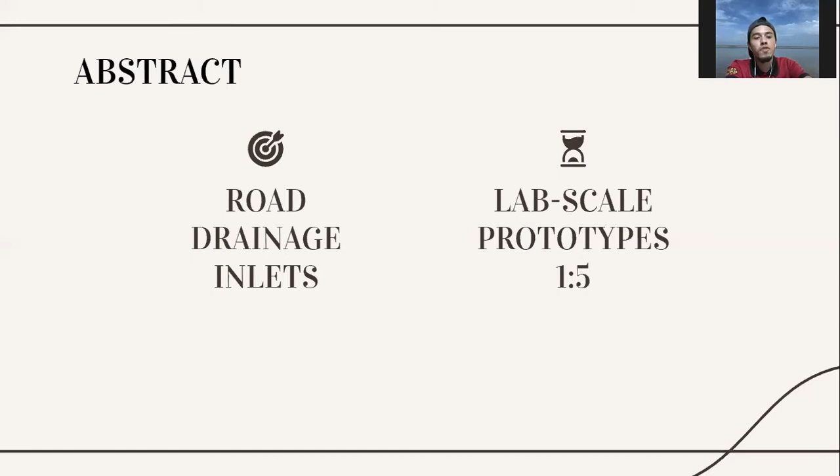Abdullah Al-Mamun. First and foremost, for the introduction, I would like to highlight my topic focused on studying common road drainage inlets. Hence, I needed to construct the prototypes as lab size to fit with the hydraulic lab equipment.

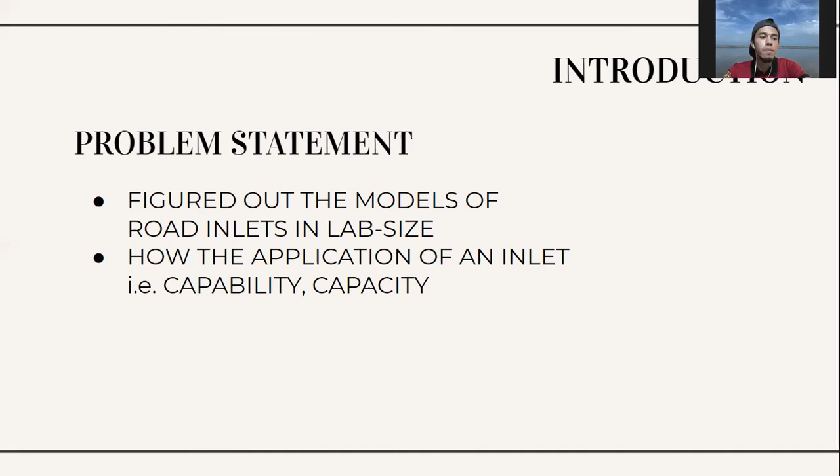Next, the problem statement: the topic was completed in order to figure out the models of road inlet in lab size first, then to carry out how the application of an inlet is in terms of capacity or capability, etc. That's related.

Then the objectives of the project are to study the rainfall intensity relationship in order to establish the commonly used models of road inlets in physical lab size, and the last one is to figure out the hydrology

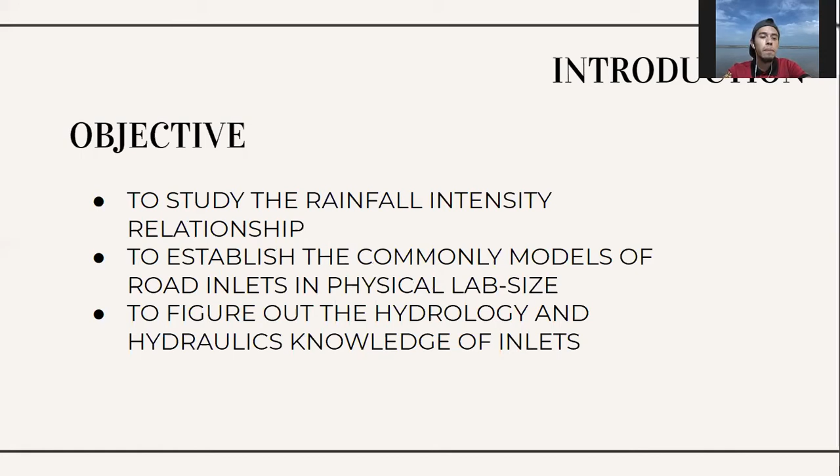knowledge related with them. For some brief methodology, lab work experiments were done to collect some parameters of data, such as water depth and outflow discharge of an inlet, plus the selection and assembling of the road inlet

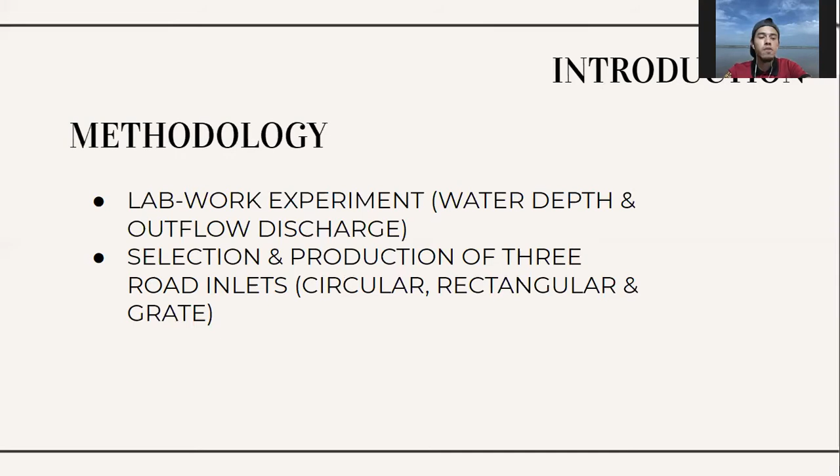models. For the inlet selection, I had selected the circular, rectangular, and also the grate types. The materials that were used are plastic boards, PVC pipes, and a few other things.

For the literature review of this study, some listed keywords were explored, such as rainfall intensity, hydraulic structure, weirs and general concept, discharge capability, discharge coefficient, steady state flow, etc.

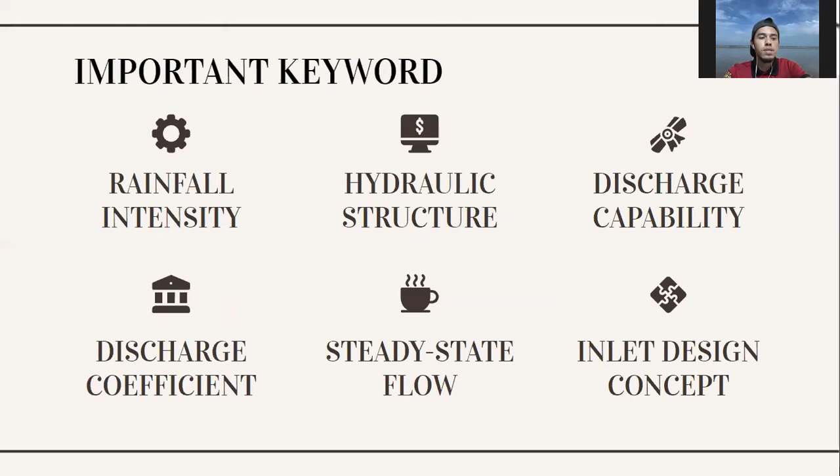For the detailed methodology, the first phase was in FYP1, which focused on research activities. The second and third phases focused on selecting the inlet, constructing them, and also lab activities. Then results and analysis were the last part of the project.

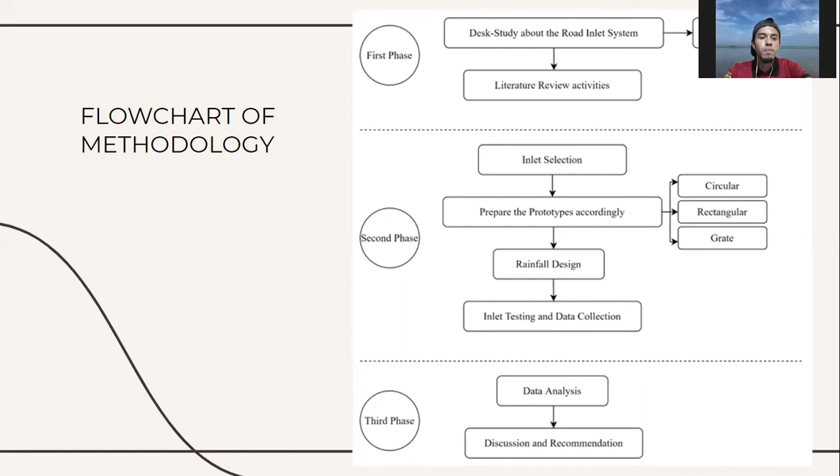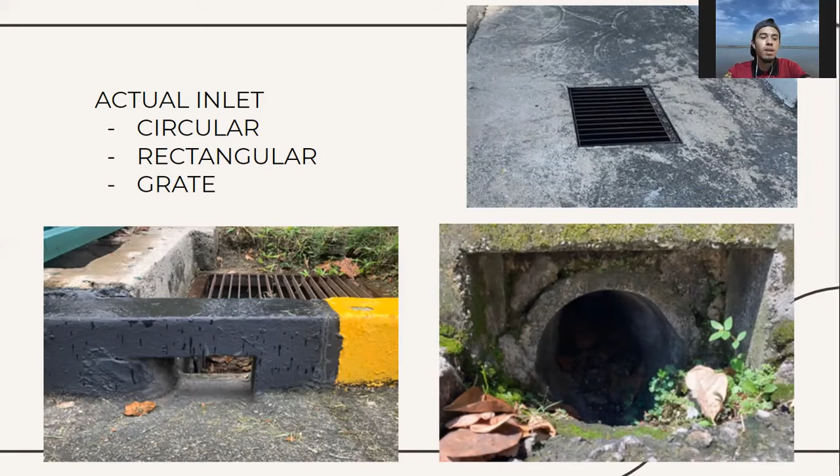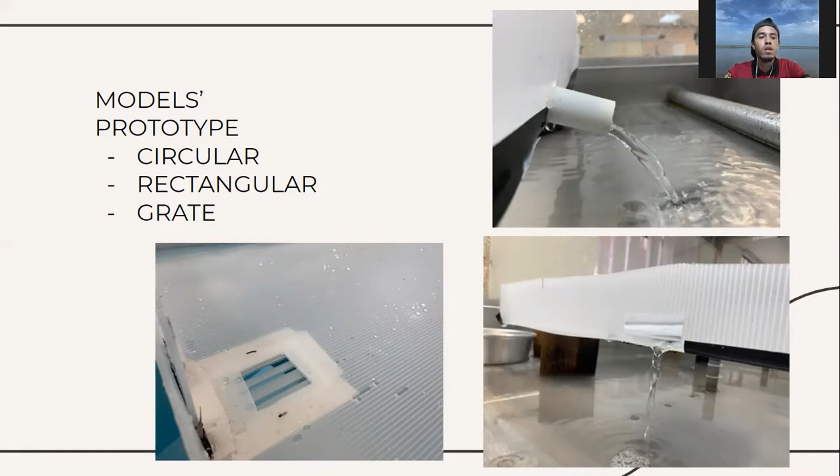For the prototypes, I scaled down the size to be around 1/5 of the actual size.

Next, the important equipment used was the rain simulator, as the inflow rate could be set by the meter, and the rain simulator can be used in the hydraulic lab.

Next, this is a short procedure during the experiment. The inflow rate was manipulated to a few readings for all inlets to see the comparison. Four sprinklers were used, so the area covered by the rainfall was around 0.25 meter square total.

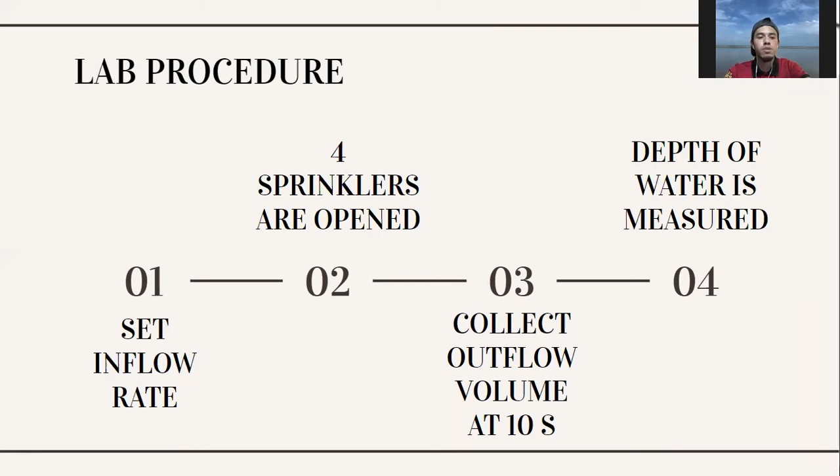After that, discharge water was collected at 10 seconds consecutively for 3 times to get the average. Lastly, depth of water around the inlet was also measured.

Then we move to the result and discussion part. First, rain intensity was calculated by converting the inflow rate. Then calculated inflow was obtained by using the rational method.

Because we are using a specific area, the outflow seemed to be proven with inflow from the meter. After getting all the parameters, some calculations were done to make the analysis. Water depth was measured to study the difference influenced by different types of inlet.

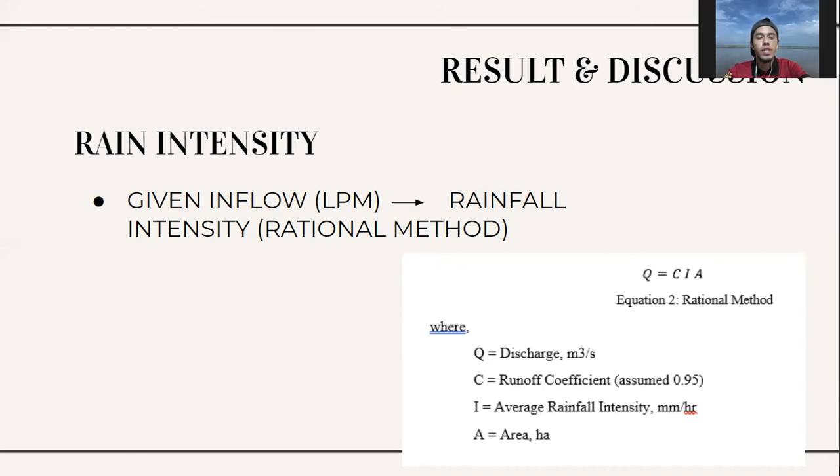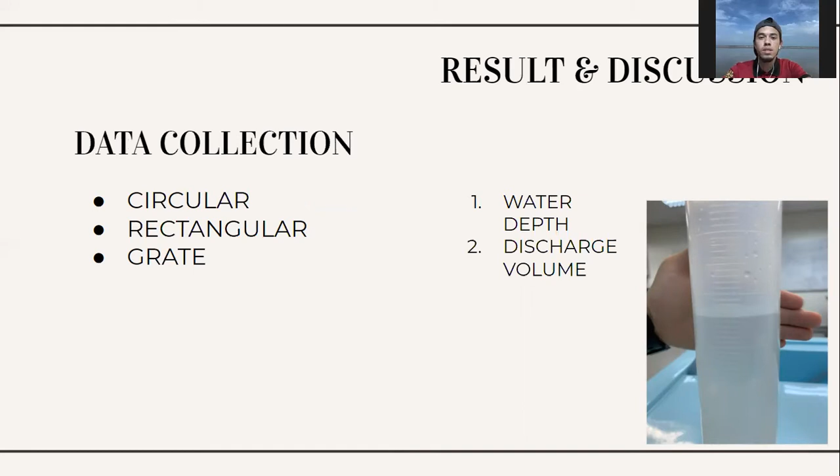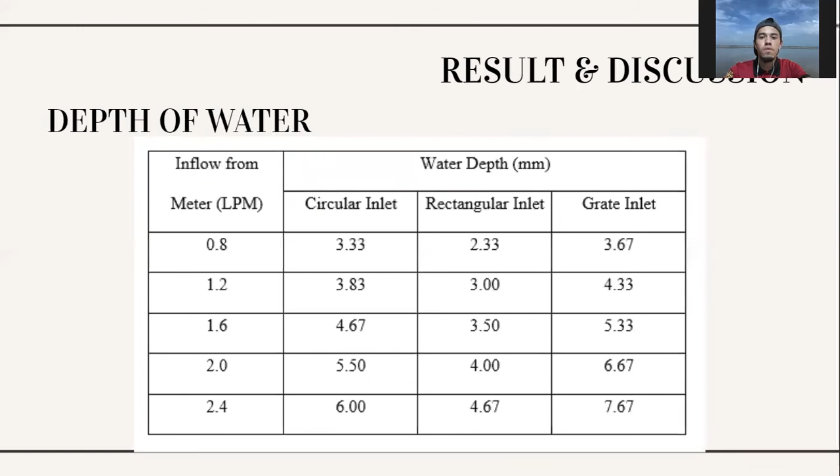Next, from the grade for the collection of data, this is a summary of how the data was recorded - this is the depth of water throughout 3 different inlets. It shows variation for different types. So from the table, I constructed the graph.

What I can conclude is that the grate inlet got the highest water depth accumulated near the inlet, then circular and rectangular. This is because the position of the grate inlet itself is put on the ground, which is horizontal, so water would channel 100% through the inlet.

Moreover, the opening size of the inlet was smaller compared to others, so the capability and capacity for water to flow through it was quite limited.

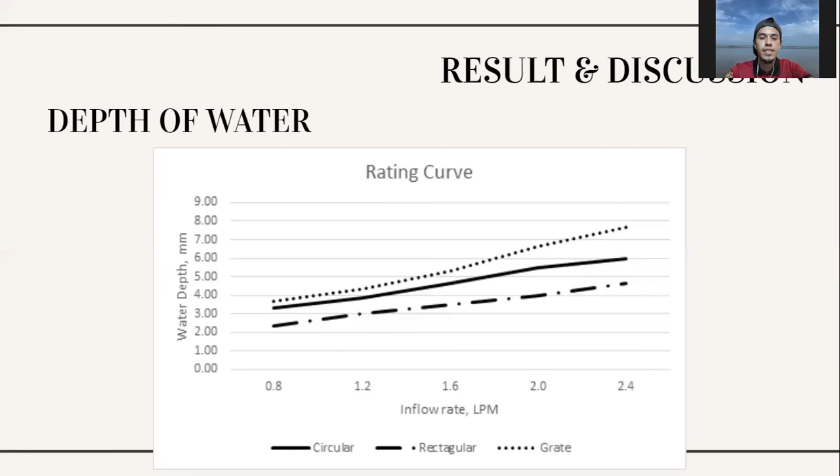For circular and rectangular inlets, their position will bind to the road curb, for example, as it is put in a vertical position, so water could flow through them freely as long as the water was not over the height of the inlet. That's why the depth of water for the grate inlet is more compared to others.

Next analysis is on the inflow and outflow rate. From the result here, the inflow and outflow seem to be the same.

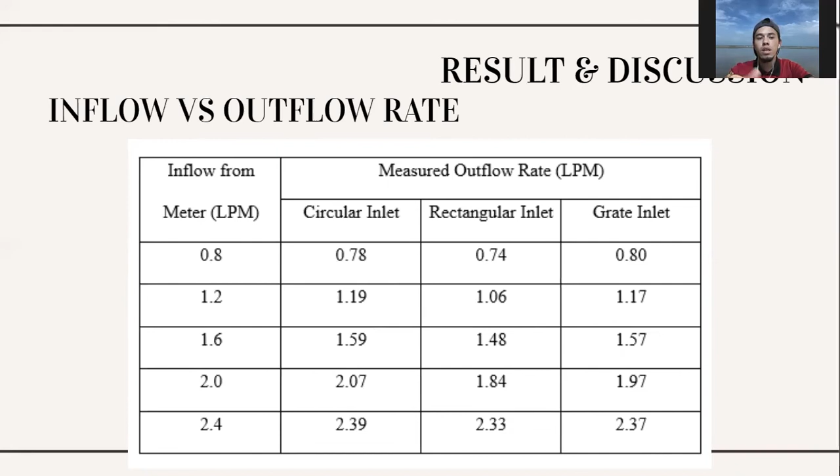For a real situation of flows, basically many roughness factors should be considered, but for this prototype we didn't consider roughness equations at all because the platform is smooth. But what I can conclude is that runoff might take some time to enter the inlet in reality.

Next, the other analysis is on the calculated outflow for each inlet. For this section, flow in channel and weir formulas are used to justify the discharge. For circular inlet, parameter of water depth and diameter of opening are vital to find out the discharge.

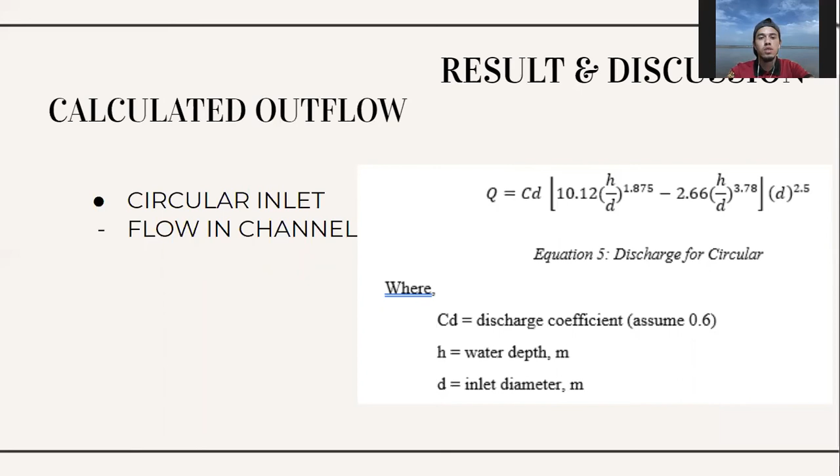And then for the rectangular and grate inlet, as their opening shapes are similarly the same, I used the Rehbock formula.

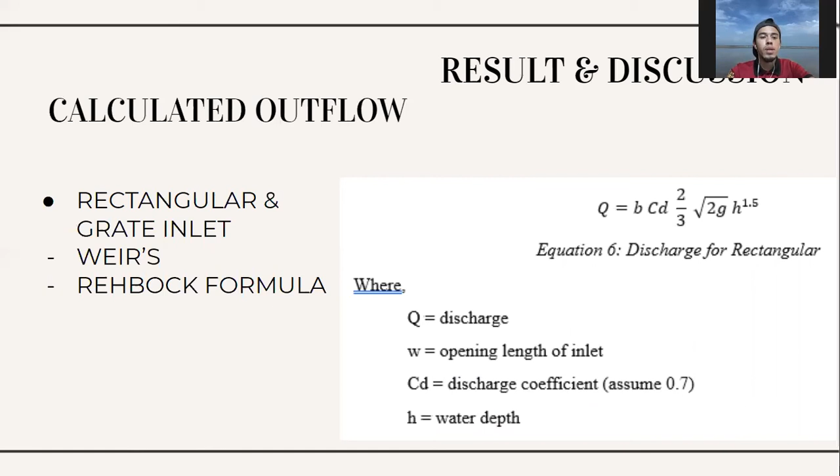The result of the calculation proved that the error between measured and calculated was below 10%. To be honest, some numbers are beyond that, but I may conclude human error was involved when collecting the data.

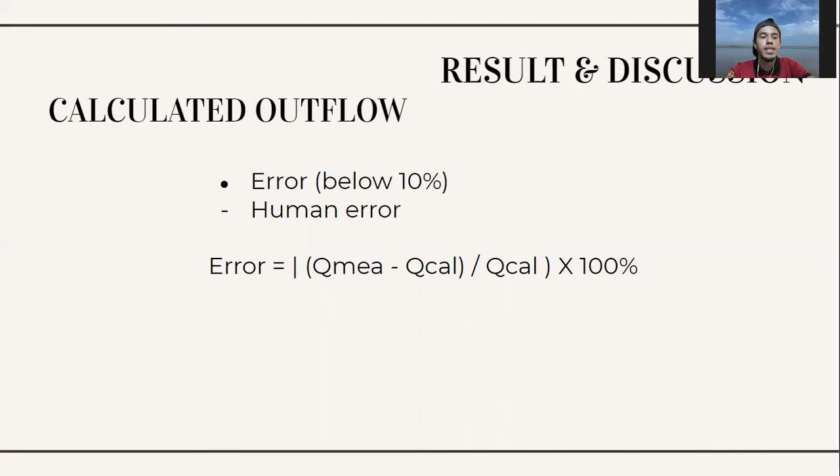Last but not least, for the analysis part, another parameter, discharge coefficient, was determined. Discharge coefficient, or CD, is the ratio of measured against theoretical discharge. It relates to steady flow with the same shape.

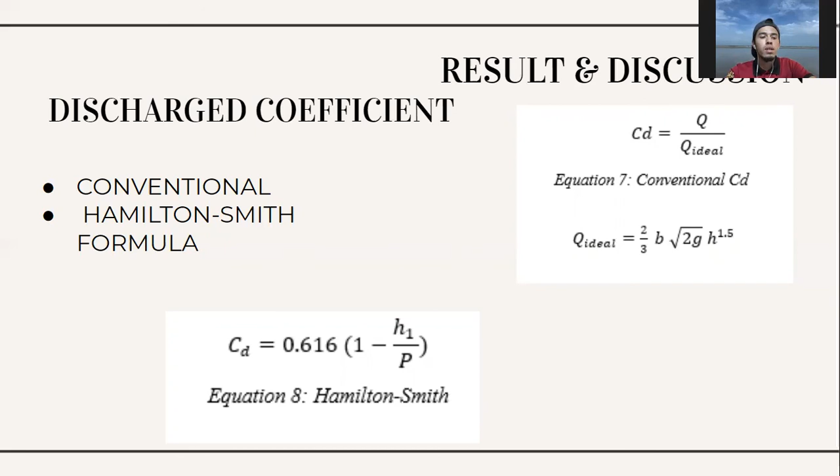Rectangular inlet was selected to prove the theory. So discharge coefficient is determined from two different equations, which are the conventional and also the Hamilton-Smith.

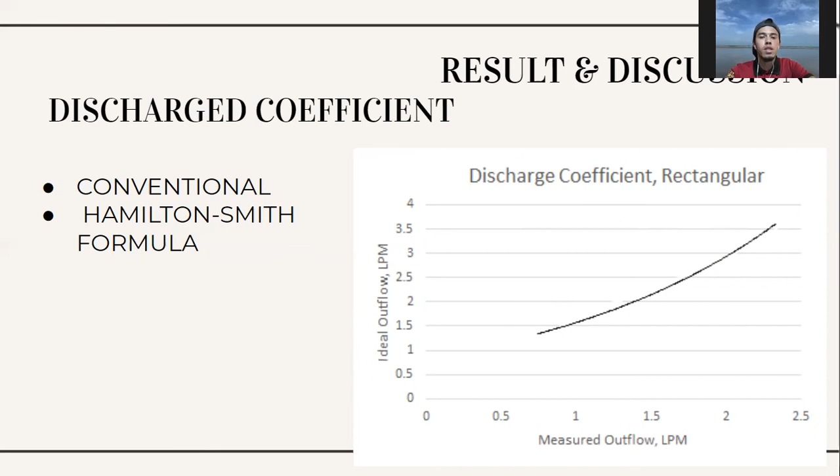Both analyses give small difference which proves both equations. The discharge coefficient for the particular inlets can be concluded to be around 0.6 to 0.65.

Okay, the last part is the conclusion and recommendation. Throughout the lab work, the conclusion that could be made is that size of opening and inlet shape, as well as the position horizontally or vertically, matters.

Hydraulic elements discovered are the steady state flow for the lab work without considering the Manning's equation, so we can see that the inflow rate and outflow seem the same.

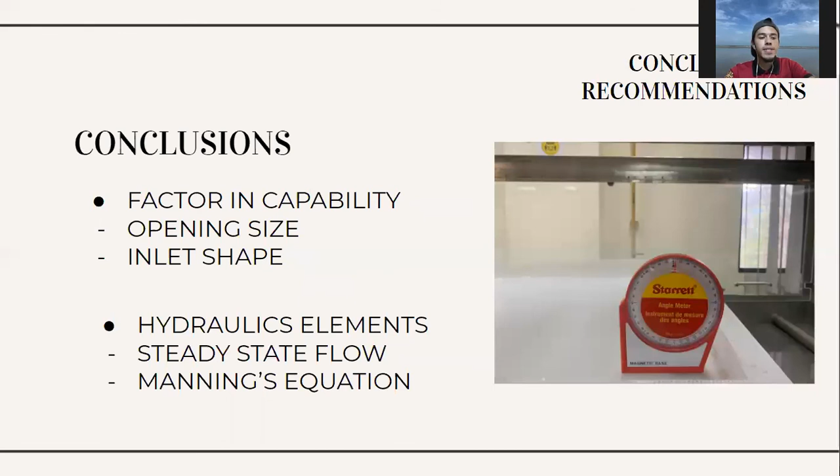For the recommendation that I could give for future research, if relatable, try to consider the element of slope roughness and others that are related, because they are one of the parameters throughout the equation to find the respective total discharge.

And also explore the inlet capacity, efficiency, and spacing, as MSMA, our manual in Malaysia, has established the guidelines.